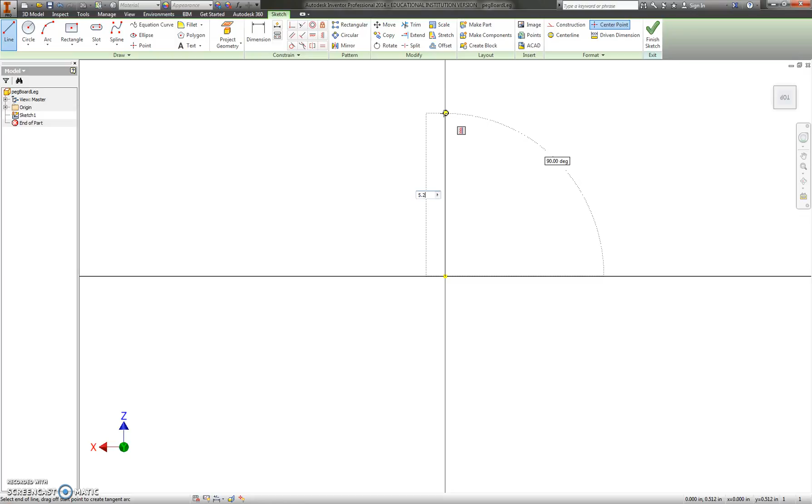So I'm going to start here and left click, move my mouse straight up, and without clicking, I'm going to type in the dimension that I want, which is 5.25, and press enter. And now it's gone out of my view, which is annoying. So I'm going to go over here to top and click right in the center, and then I'll bring it back into view. Okay, so now I want this to be 90 degrees, and I'm going to make it 3/4

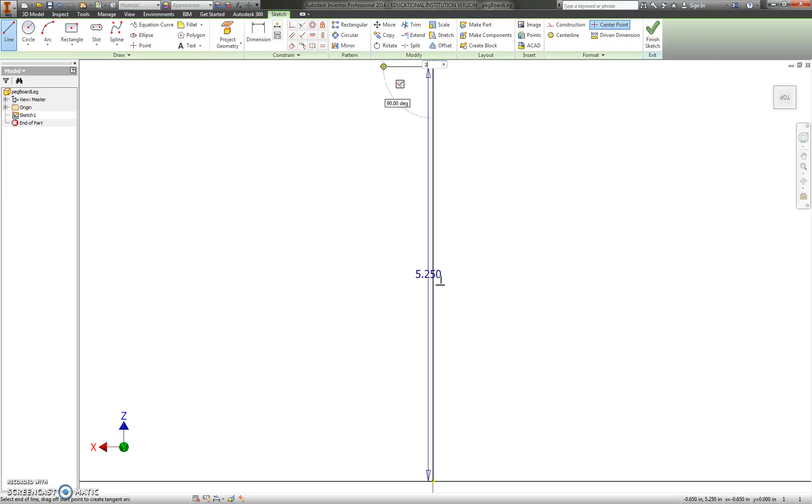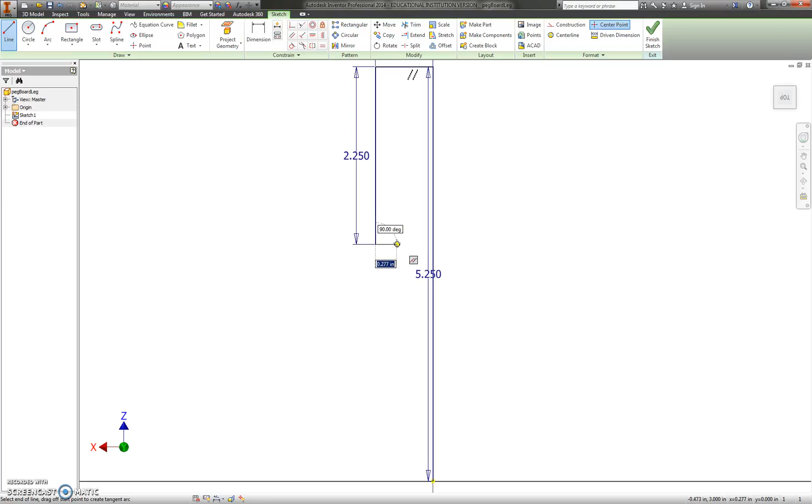of an inch wide. And I could type 3/4 if I liked, or I could type in 0.75. By the way, you can always do that: use a fraction or the decimal. Usually the decimal is easier for me. And now I'm going to make this go down 2.25 inches, 2¼ inches. So I type that in, and 3/8 of an inch in for the notch, which is 0.375. And straight down, 3/4 of an inch, 0.75.

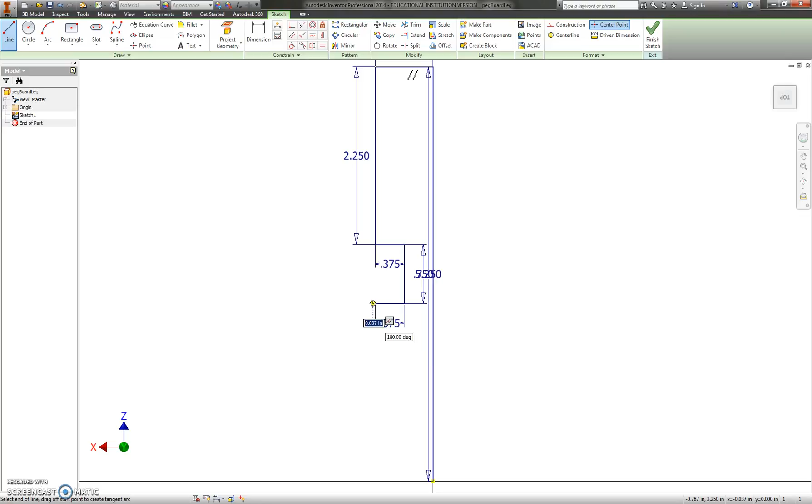And going along like this and dimensioning the entire way is the very best practice. It's the quickest for me. Sometimes it's easier to dimension after the fact, but I think this is nice. So this is going to be the same, 0.375. And then straight down, and you can see this is 2.25 as well. I can hit enter. And then, oh, it got mad. Oh no. Alright, whoops. 0.75, that's what I get for not dimensioning.

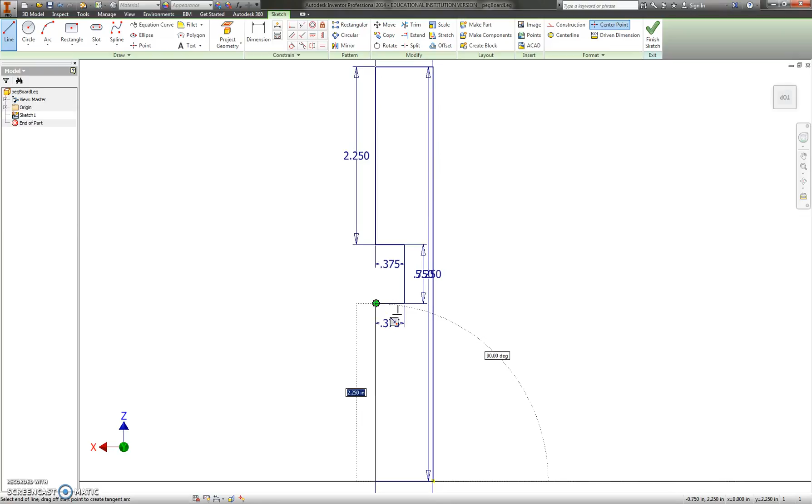And I'll click that together. And see how it's green? If it's yellow, it's not connected. If it's not connected, it will not extrude. If there's any breaks in this shape, it won't extrude later. So I want it to be green. I left click. Okay, so that's the basic profile of the leg. So now I'm going to check OK.

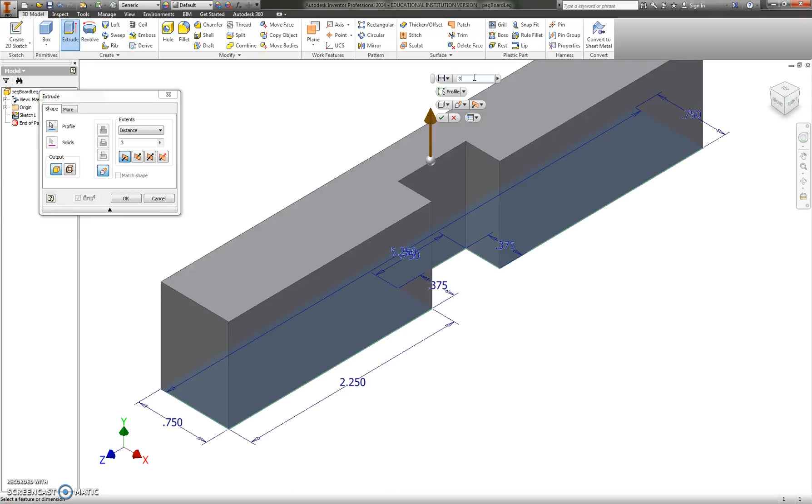Finish my sketch. It's hard to see, so I'm going to click the home to make it more visible. I'm going to go to extrude, and it's the only thing in the view, so it should automatically pick it up, which it did. And I'm going to change this number to 3 inches and press enter. Okay, so that's my leg. Now I can go ahead and save that by pressing the disk button up there, and my pegboard leg has been created.